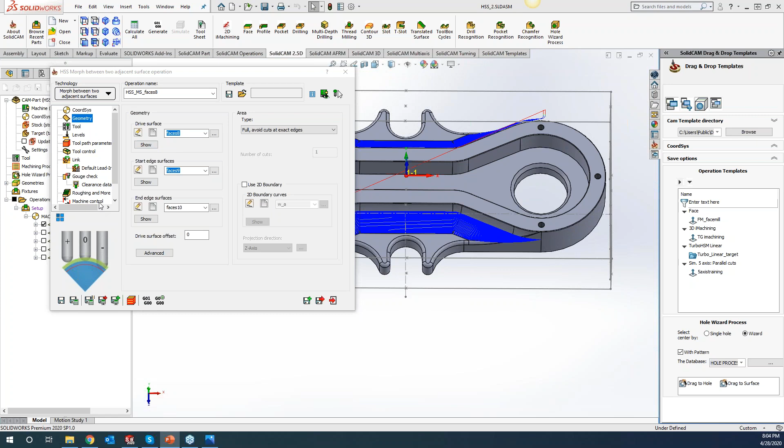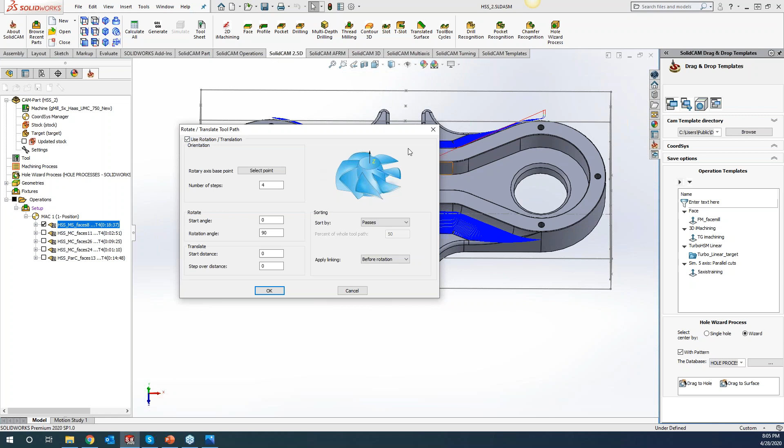Now the second thing, and like I said, I'm just going to focus more on HSS because it's the exact same between HSS and 5-axis. If you go into your roughing and more, we have all these options for additional features: roughing, mirroring, stock definition, and whatnot. So if I come in here and let's say I turn on my multi-passes, we'll do 10 passes at 1 millimeter, and maybe I want to do translate, maybe I want to do some stock.

So as it was in the past, if I wanted to go in there and turn something off, I would have to physically go click on the button and go in there and turn it off. So now what they've done is they made it a little bit easier for you guys. If you would like to turn it off, just hit the checkbox and that will automatically turn it off.

Now, if you click on the stock definition button, it's going to reopen the dialog for you, and then you can turn it off that way as well. But it makes it a little bit easier for you guys to toggle back and forth by turning it on or off by clicking the checkbox here. Nothing huge, but it is something that will definitely help you save some time there.

Okay, any questions on those two easy things? Nothing so far. Yeah, I think that one would be a good one to use if you're using the multi-passes or the depth cuts to rough something out and you wanted to come in with a finish pass. You could easily use that save and copy feature, then just uncheck the depth cuts, save and calculate, and you're on your way. Anything to speed up that process for everyone, that's the main goal.

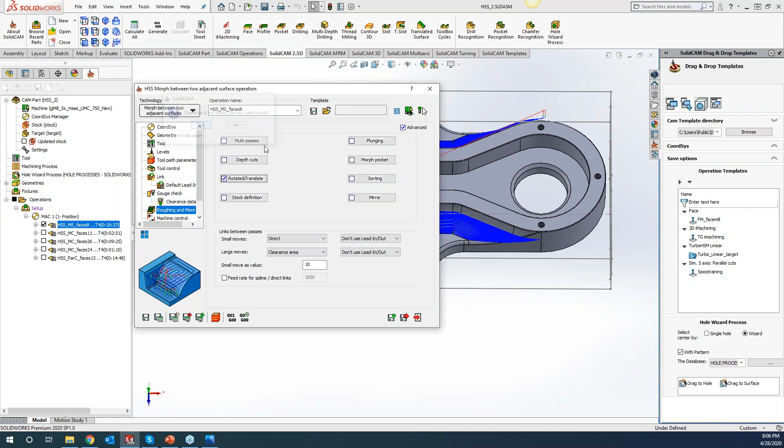Now, yes, we want to exit. So now what I'm going to show you guys is, all right Greg, you got to remind me, I got to stop saying guys, because that's what I've been told.

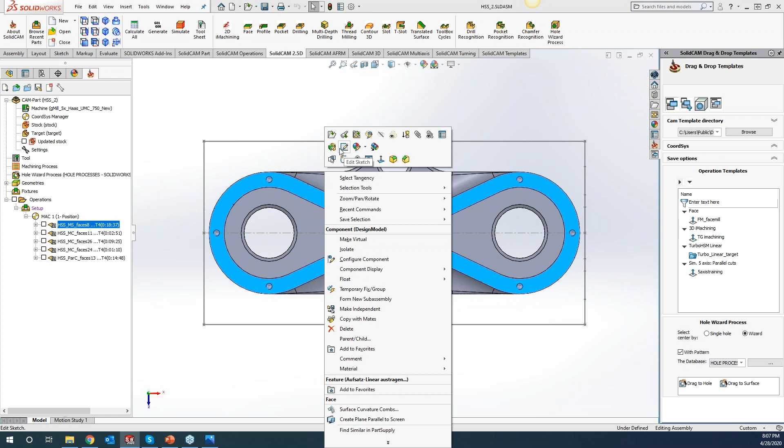So what I'm going to do here is, a new feature is the boundaries. We've had boundaries in HSS and 5-axis for a while, but you were not able to have multiple boundaries. What a boundary is, what I'll do here is just a quick sketch. We'll throw a simple circle there, and maybe a boundary there. Good enough.

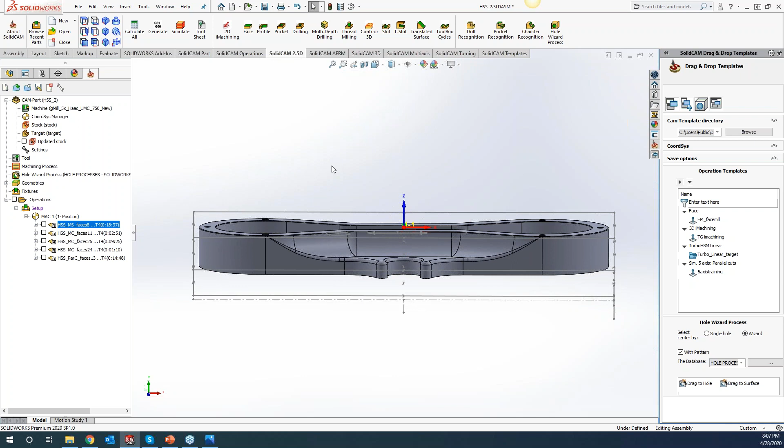So now I'm going to call those sketches as boundaries. You can see that they're drawn on a 2D plane, so I don't have to project them down to the surface. I can keep it up on any plane that I would like. I can have it sitting 10 inches above there if I would like. So if I go ahead and turn on our toolpath now, you'll see our toolpath is going through that region.

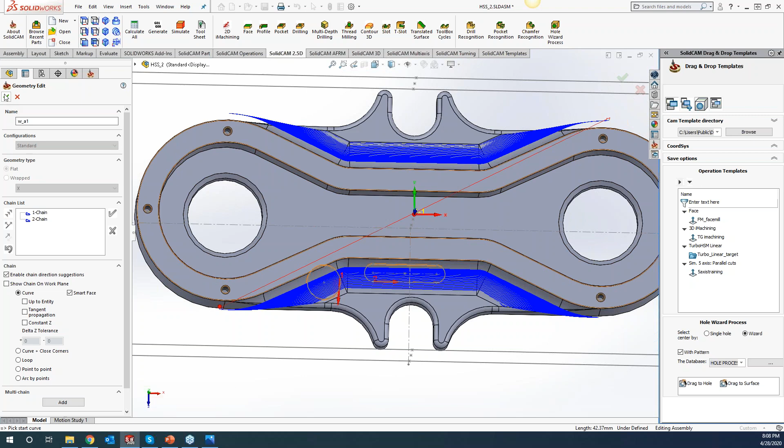So now with the 2020 HSS and 5-axis, if I go to my geometry page, I can turn on 2D user-defined boundary, and I can grab that circle as well as the slot here. So now I have two boundaries. I'm telling it to stay contained with that area. Now, if I'm projecting this from other than Z-axis, I can do X, Y, Z, or a specific axis. But what I'm telling it to do now is to keep only the toolpath that is in that designated boundary.

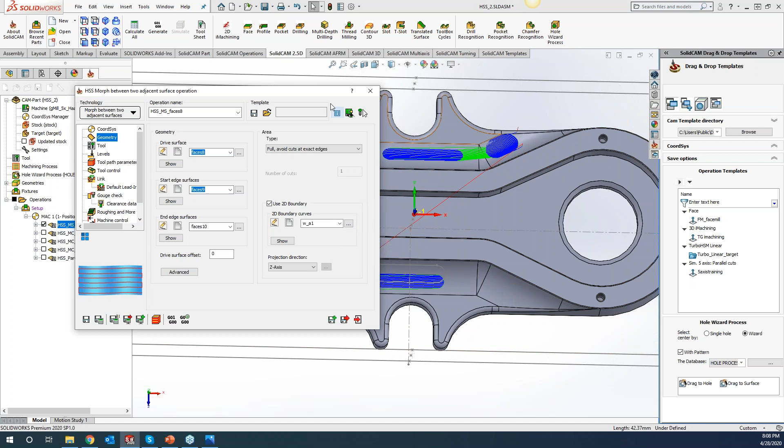So now you'll see that, get used to my 3Dconnexion mouse on the other computer, that we have our two different sections. And you can see that my toolpath, when it's going from the circle over to the slot, is just doing a follow surface. So if I don't want it to follow along that surface, what I can do is come in here, go back to my links, and say safety distance, and for large gaps, I'll do safety distance.

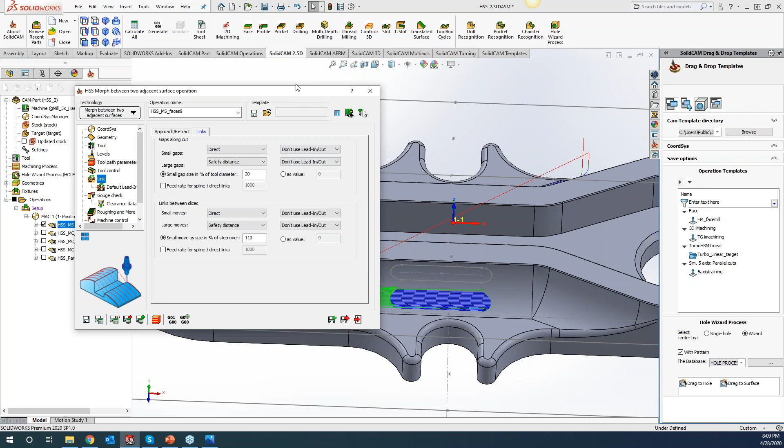And now it's coming up off of the workpiece, so we're not - can everybody see that? It's coming off by the safety distance, but let's go to the clearance here, that way it'll be very easy. So now you can see that it is only doing the toolpath per my boundaries. And like I said, in years past you could only do one single boundary, where now you can have multiple boundaries.

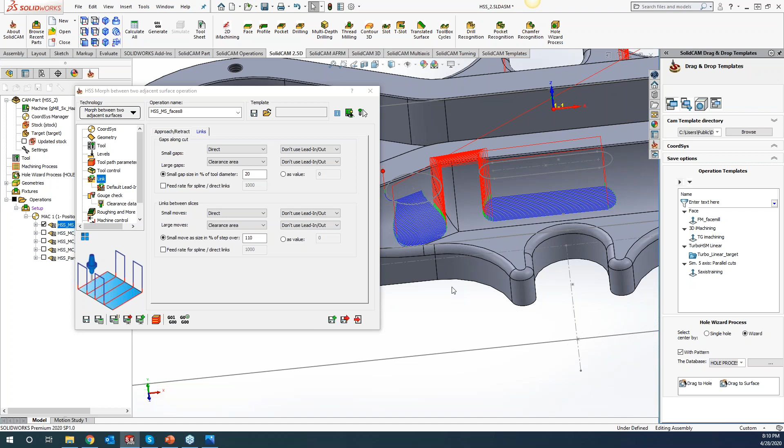So now, Kevin, we've got a couple questions here. Yeah, one of them is, can we utilize the boundaries as avoidance areas? Yes, so what you can do is do a gouge check against that area as well.

So if you wanted to do a reverse rule and go to our working area, let's get our toolpath looking back the way it was. Okay, well at least I think we can. Gouge check. So what I have to do is convert it into an actual surface to do that.

The only other thing, let me try something here. If I go to my working area, got that chain, and we'll do our constant Z, and then mark open edges. Oops, mark chains is open.

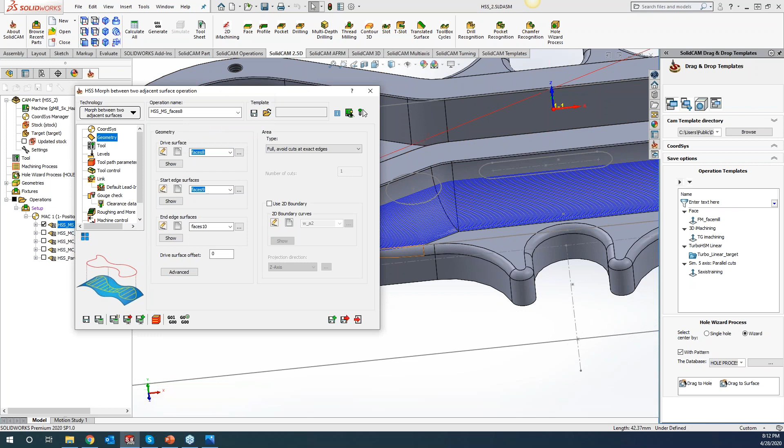So to answer your question, yes, you can, but what you would have to do is take that sketch and do a surface break. So what we can do is come over to our file here, our design, and we'll edit this model, and we'll do...

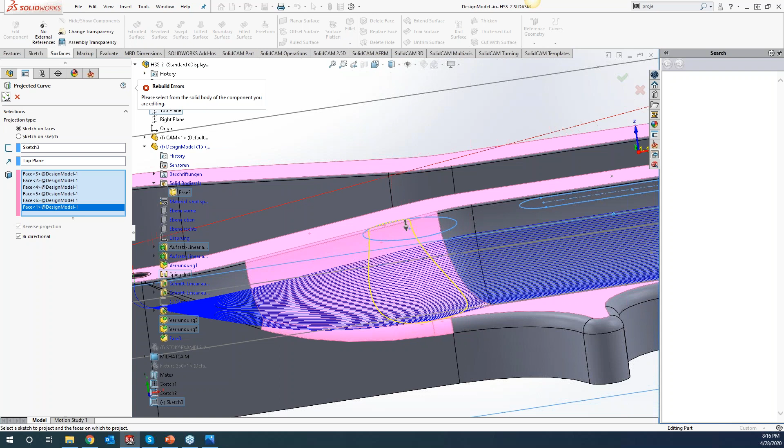For some reason, I am not getting this to project or do our surface, our projection curve here. Unless you have any ideas there, Greg. I think it's because your curve extends past.

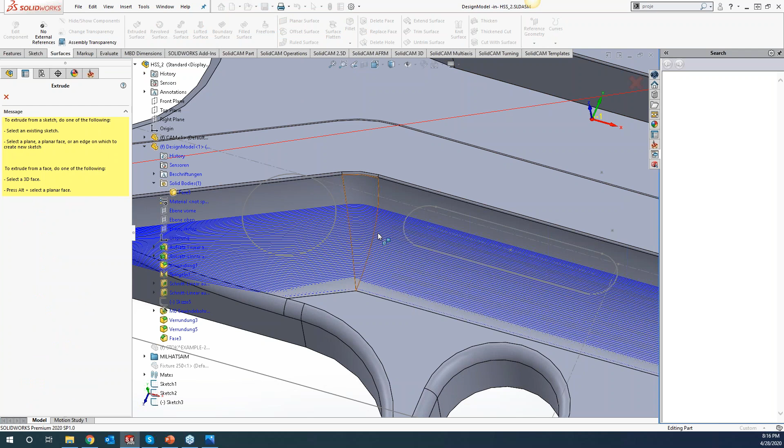What do you think about just doing it as a surface extrude? That way, when the tool runs into that surface on a gouge check, it'll omit that area. Good call. I mean, this is the long way around the question. I would say it'd probably make for a better feature request to be able to omit those areas by surfaces or by sketches.

We're actually going to be getting into the HSS, so I can show you guys how to do this a little bit better. I thought it would have been something a little bit simpler here, but yeah. So basically, if you guys do a surface break there, or like Greg was saying, a surface extrude, then on this particular area you would have two different surfaces.

So what we'd do in that case is we'd come in there for HSS, and we wouldn't use the boundary because the boundary is to keep the toolpath contained. But if we go to our gouge check and turn on our gouge check and tell it our check surfaces, and tell it to do everything minus that circle of that surface, then it will do all the tool path completely avoiding that as well. So for what you're looking for.

Okay, yeah, I didn't even realize a filled surface for either of those sketches would do the job, as long as you weren't using like a lollipop cutter or something like that that had the capability of doing an undercut.

Okay, so going on to the next question, Jake is asking if you had it separated out by working area, those two pieces, could you have it do just the circle and then move over to the slot geometry? Yep, so for that, let's get back, let's turn that on here, and just make sure I got those working areas. Okay, and let's get our tool path.

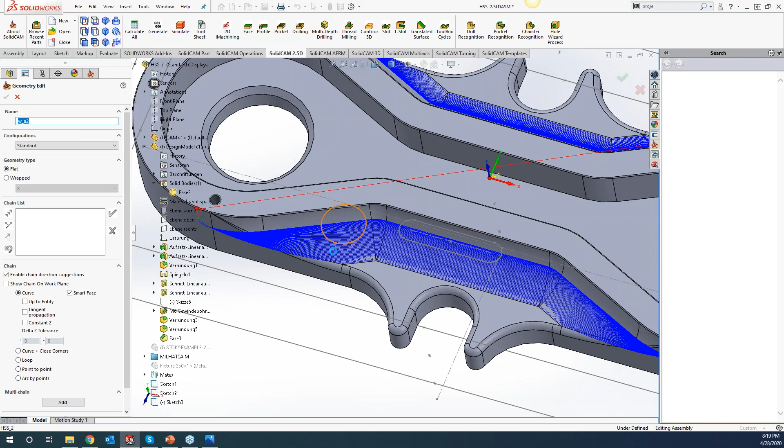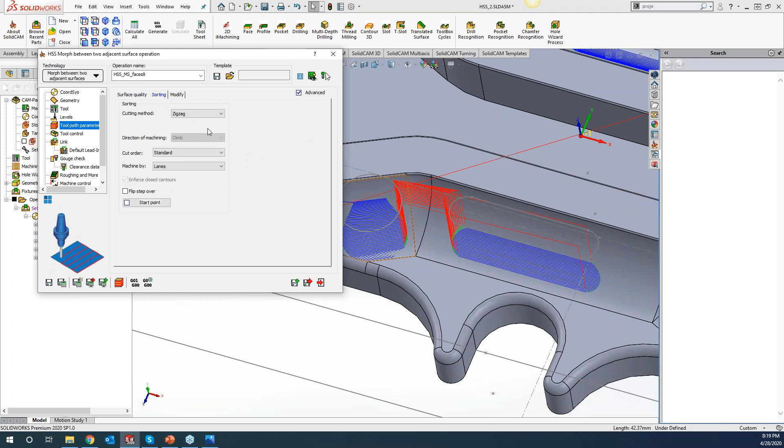That's because I opened up those. Let me re-grab these here, constant Z. All right, so instead of going back and forth, it's a little bit tough, because the design intent of doing separate areas is to completely finish one surface over here versus a surface over here. So to do that, we can go to our toolpath parameters, click on the sorting tab, and instead of machining by lanes, we can do machine by regions.

Now, we'll have to see how the toolpath looks here, but okay, yep, it is doing it. So what we're doing is, you can kind of see in the picture right here, if I can get my mouse, there we go. So it's going to do every region first before it goes on to the next region. So now you can see we're doing a complete zigzag on this one over here. Once it finishes that complete circle, it's going to come up and start doing the slot feature over here.

So to answer your question, yep, that's how you do it. It is going to be your machine by regions versus machine by lanes. Great question.

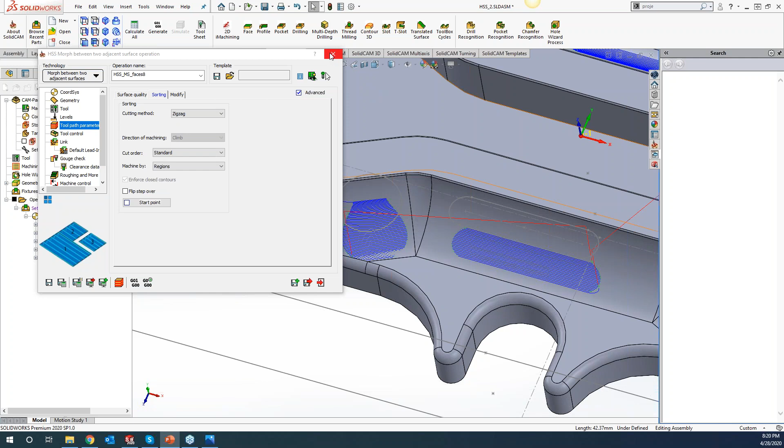Cool, I think that clears out our questions for right now. If you want to move on to the next topic. Excellent, I don't got much more, but the next thing I'd like to show you guys is...

Nope, it's in the part. Yeah, hop over there for you guys.

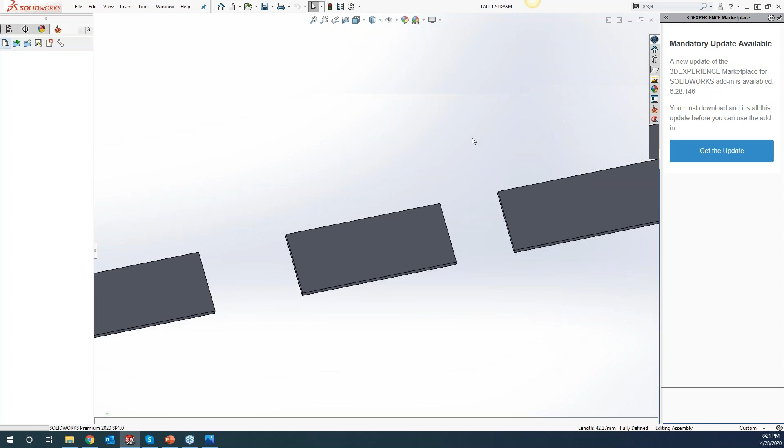So this isn't something too huge, but it was definitely a high request item. This one would have been nice to have when I was in a shop. I really like this one. Now we have 3 completely separate parts, and we were just talking about with Jake's question, machining by lanes versus machining by regions.

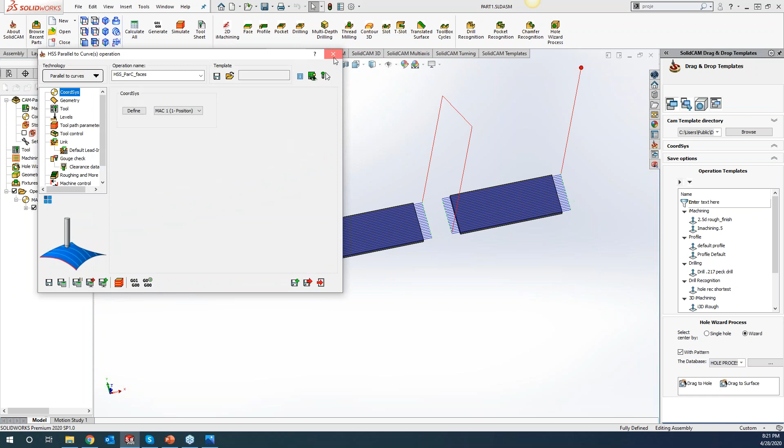We'll go ahead and open up this toolpath. Well, actually, let's just start fresh. Delete this, and we'll go to our SolidCAM 3D HSS, parallel to curve. So now I have multiple drive surfaces that are completely separated. They're not connected in any way whatsoever.

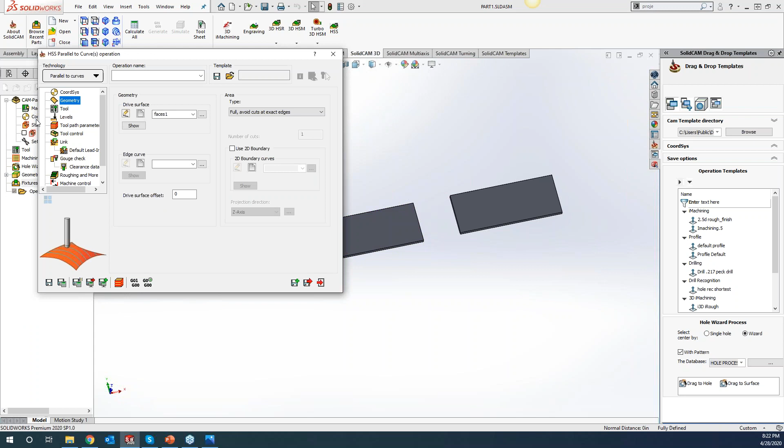Edge curve, just grab that one for that, this one for here, this one for here. And I don't know if you guys knew this, but you can pick multiple sketch curves in your operation itself. It doesn't have to be one particular curve. Grab our end mill here.

Levels are—well, here's another good one that I would like to show you that is new. Before, you guys were used to seeing this dialog right here, where either you had the option for plane or cylinder. Now they've added a new feature where it's automatically going to find your clearances.

Now this isn't too huge with HSS, but when you get into simultaneous 5-axis, this is definitely your new best friend. So now we don't have to figure out how big our cylinder or rotary is or anything like that. We can just go right to automatic now, and it will automatically find all those for you. So a real cool feature that they've added in there.

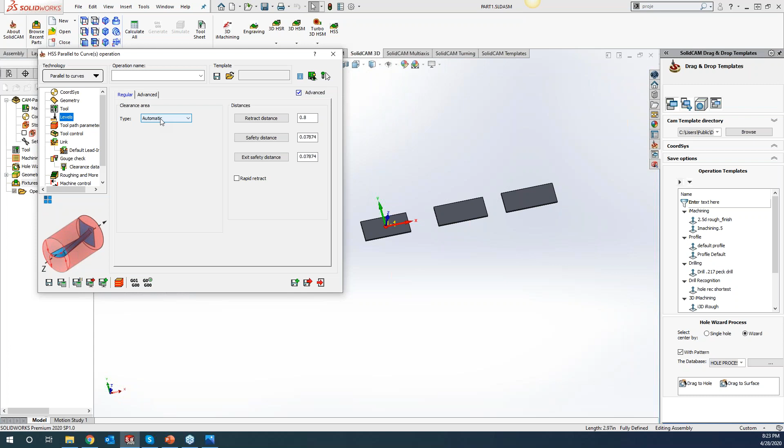Now, let's go ahead and save and calculate. And right now we go to our sorting. We'll switch it over—instead of lanes, we'll go to regions. And now, Jake was saying in the comments, there's a lot less retracts in there, which is very true.

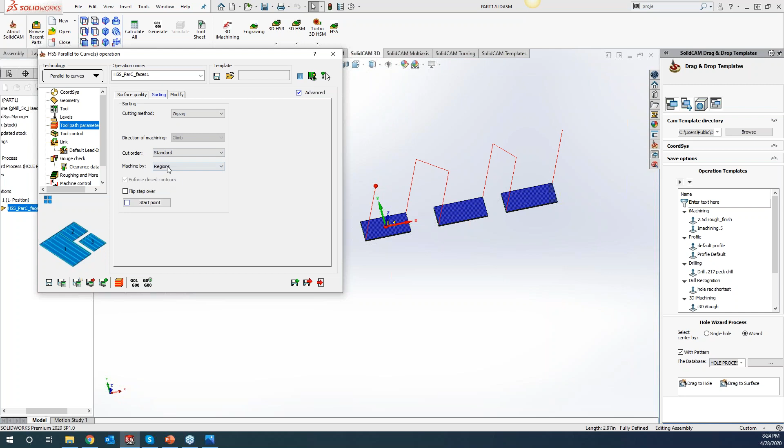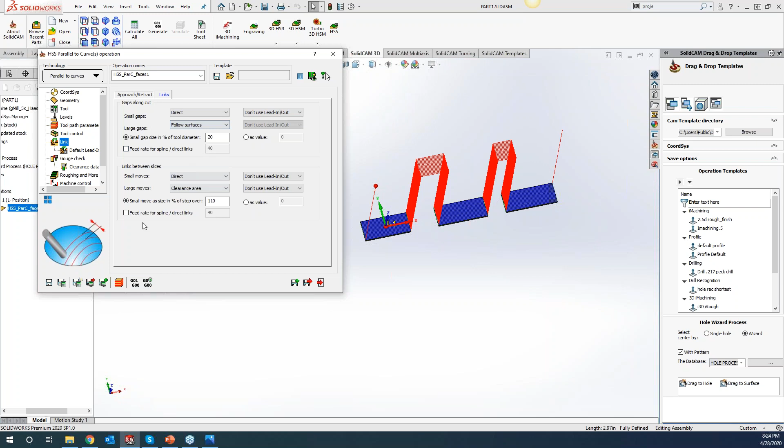Now, if you wanted to skip over that—and this isn't anything new, but just to show you—if we just wanted to, instead of coming up to our clearance or just working on this part, being done, moving over to this part, being done, moving over to this part, we can also come over and go to our links. And any large gaps, we can say follow surface, and what it will do is just bridge over those and fill it in.

But you're still getting a lot of wasted cycle time cutting in the air. So that's not ideal, but if you guys ever run across that situation, you can do it that way. But let's go ahead and switch it back to regions.

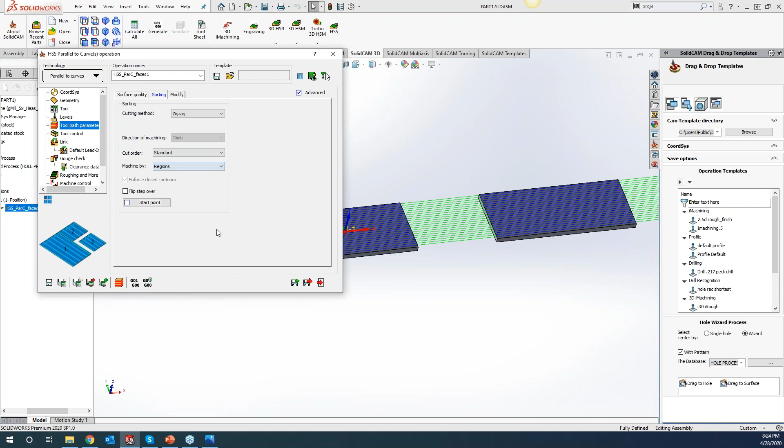Now, in the past, when we wanted to do a surface extension for all these faces, all we had in our surface extension was start, end, and side extensions. Well, now what they've done is added it so each one of these can have their extensions added on there. So for this particular one, let's just say 100% of our tool diameter.

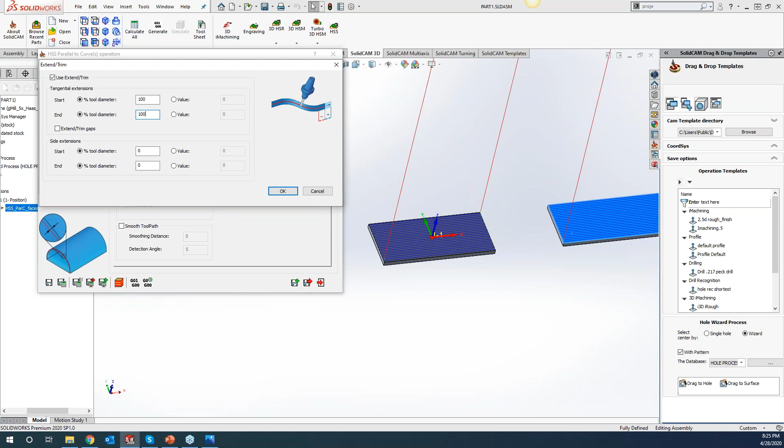Now, in 2019, it would have just extended our first initial cut in right here, as well as our end cut over here—it would have done nothing for the center part right here. So now if we go ahead and save and calculate, you'll see that it does a surface extension for all of our toolpaths, not just starting on one part and ending on the other. Now it does it for all of the parts. So that's definitely a great new feature that they've added in there.

Yeah, it really cleans up the CAM tree because you no longer have to create 3 separate operations to do these surfaces. Absolutely.

All right, now with that being said, that is basically all the new features that they've added with HSS and simultaneous 5-axis. Like I said, these are both identical—the only difference is our tool control page is going to look a little bit different for the 5-axis. Any questions from anyone on what I just covered here? I know it's a little bit shorter than our normal class, but that's everything they've added for HSS and 5-axis.

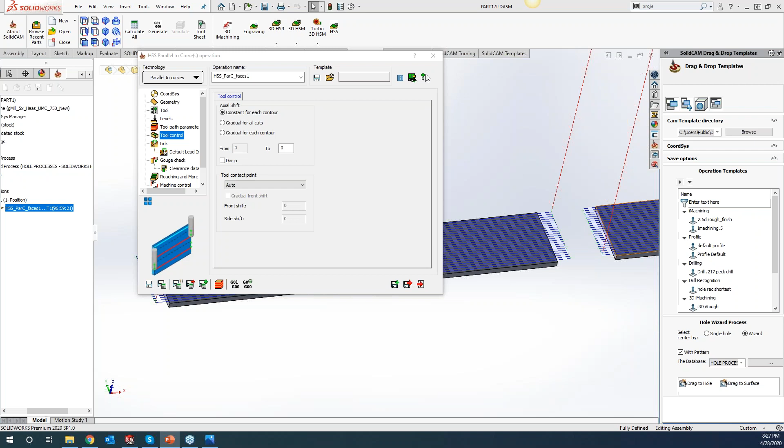Next week we will get the ball rolling on all the new features that they've added in for the beta simulator. That may all fit into one class. And then we also have some new toolpaths that have been added in there, which is the undercutting. If we add milling, you now have undercut milling right here. I'll show you guys that coming up in the future as well.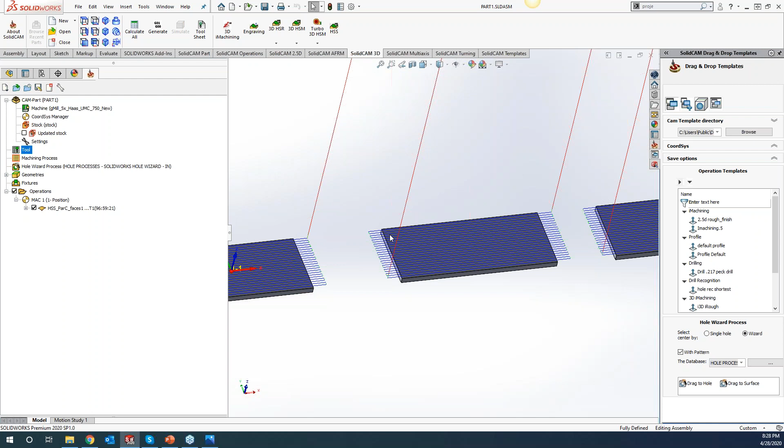The only other thing I can think of, and it's kind of old at this point, but the new tools that we have at our disposal, the oval form tools and the lens form. I know they started coming out last year, but it's also great that we're adding these new types of tools for people doing deep cavity molds, and we can take advantage of using these tools utilizing HSS and the simultaneous 5-axis option.

So we have what's called the barrel shape, which is really good for vertical, tapered walls. Instead of getting a smooth finish on a wall that has a slight draft by doing a very small step down, with the barrel cutter you can now take a much larger step down and still get that same surface finish you're trying to achieve. Same thing with the oval form, the lens, and the barrel taper tool.

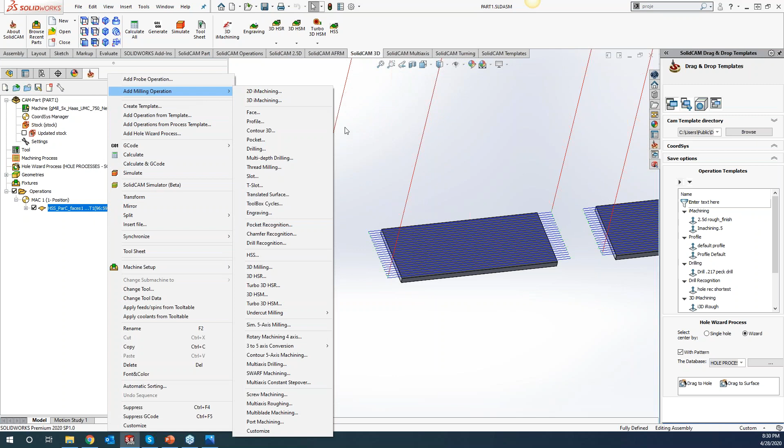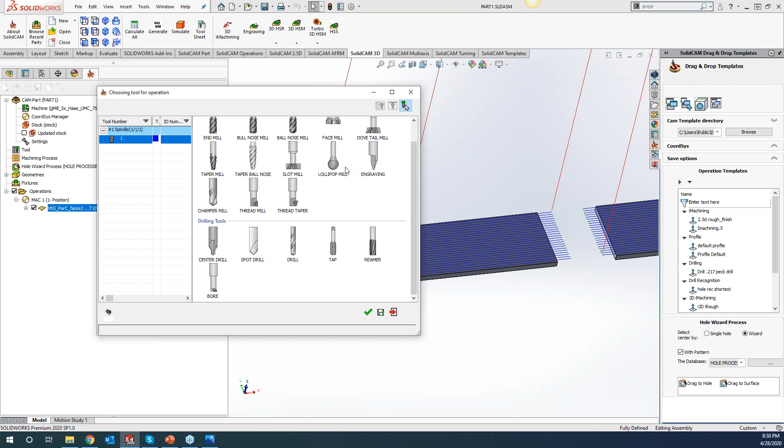So like Greg was saying, these are all supported in your guys' tool libraries. And if you're ever curious what operations will support specific tools, let's say Ronnie is looking to add a drilling operation, and he wants to use that lens tool but doesn't know if it's supported. You can click add new tool, and it will show you the tools that are actually supported by that operation. You can see we don't have our circular saw down here, we don't have a keyway cutter, we don't have our lens. So this is a good way to see what tools are supported by the operation, or what operations are supported by the tools. Great point, Greg, I totally forgot about that.

All right, well, did I lose audio again? No, you're still with us. I heard a click, I'm like, oh, was that another one? With everybody working from home, GoToWebinar has been a little bit overloaded lately. But all right, I'll stop rambling here.